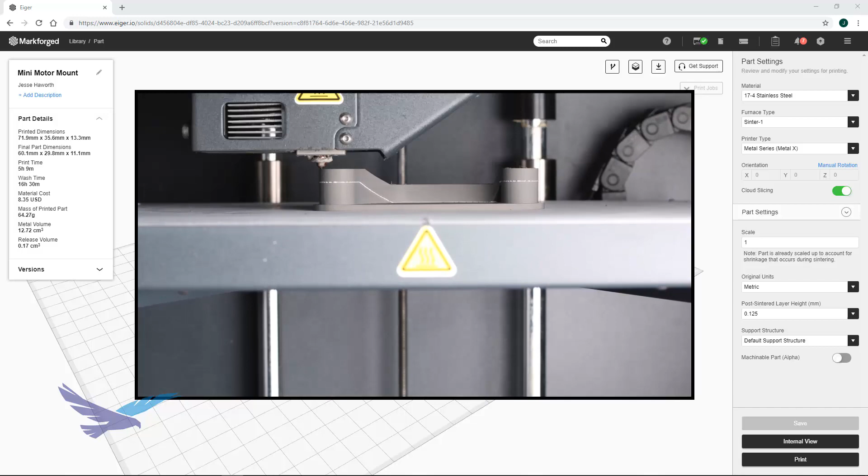As an extrusion-based machine, Metal X parts are formed layer by layer in the Z direction until all geometry is complete, as you can see in this short example. By default, Eiger will place support structures under any overhanging geometry to prevent poor part quality. Since support structures are made up of the same base metal material, Eiger places a ceramic release layer in between supports and part geometry, as you can see here.

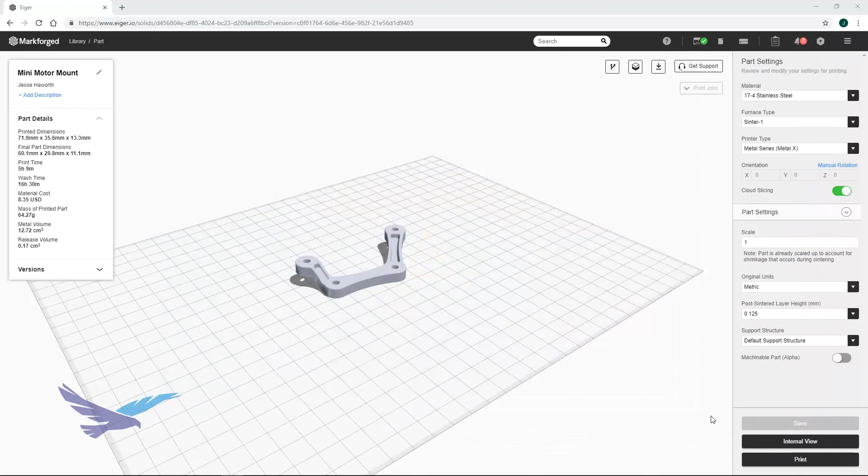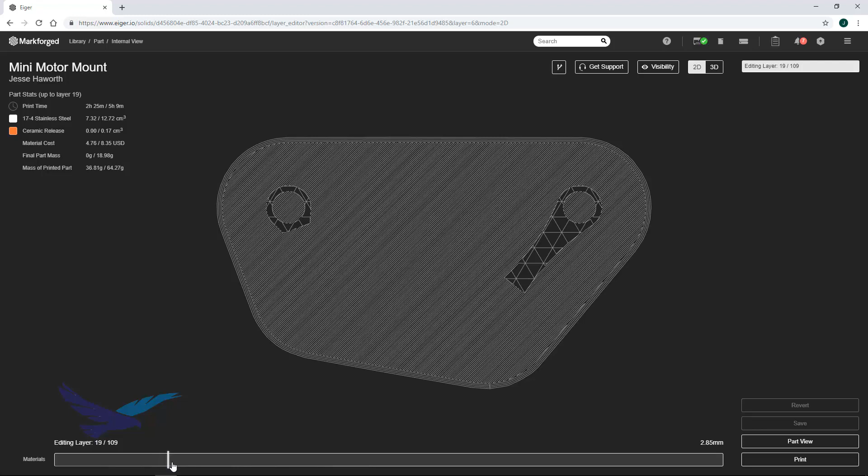To get a better look at the toolpath of support structures, you can go to the internal view of an Eiger part and turn off visibility for all display options except for support material and ceramic release. Here you can see where supports will be placed and where the ceramic release barriers are. Once parts are completely printed and sintered, the ceramic barrier will vaporize, making the separation of supports from your actual part easy.

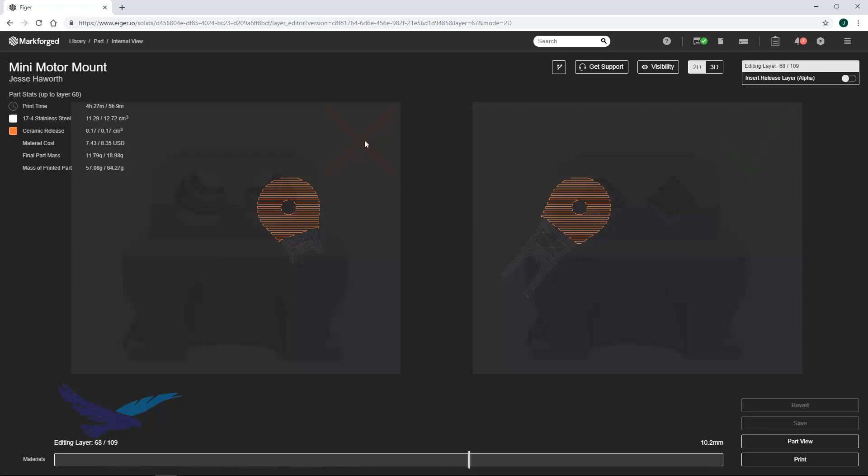As with other extrusion-based machines, simple additive manufacturing practices such as changing overhangs to be self-supporting can go a long way towards eliminating supports. That being the case, not all geometry can be modified to eliminate the need for supports, and some supports may not be very easy to remove due to part structure. So let's go over the first option that Markforged has added by taking a look at this cylindrical part.

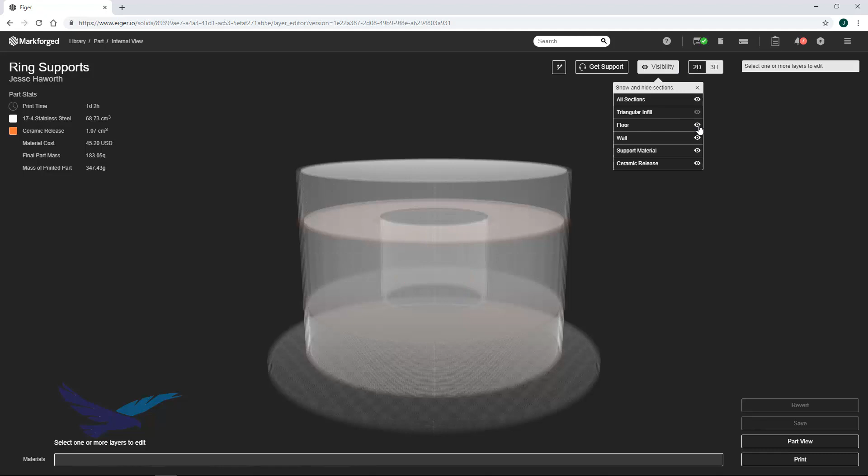So if we take a look at the internal view of this example part, we can see that the support structures that hold up the overhanging geometry are surrounding the central cylinder. Even though the supports are separated from part geometry by the ceramic release material, the shape of the part itself will prevent the supports from being removed in their current state. To avoid the need for any sort of major redesigns in situations like this, Markforged has added the Radial Support option, which we'll select here.

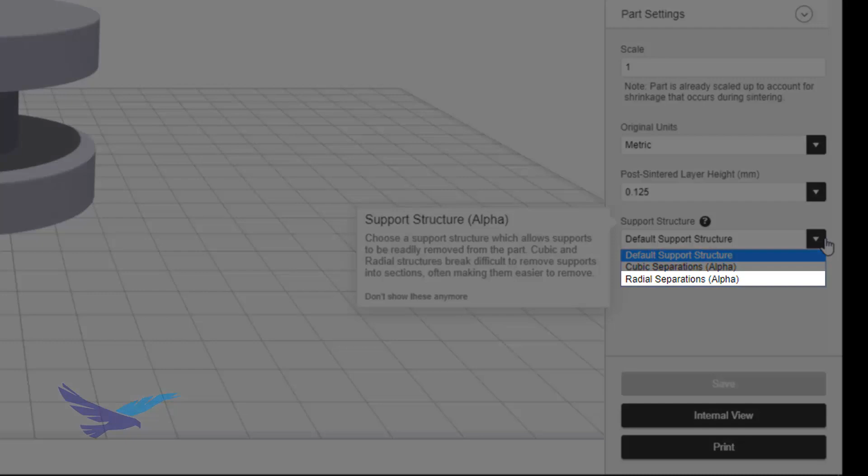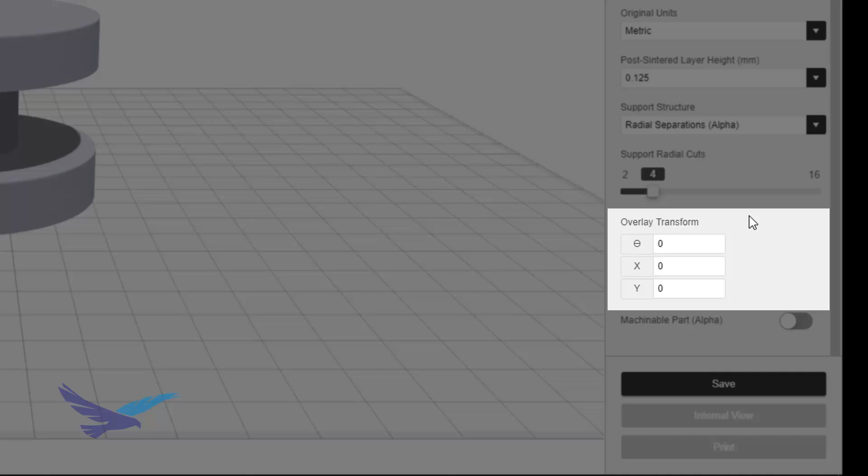Radial supports separate all of the support structures of your part into even breaks, which originate by default from the center of your part. You can think of this like separating support structures into slices. The radial cut slider that we'll use here changes the number of slices, and we'll change that to 4 cuts for this example. If needed, you can also use the overlay transform tools in conjunction with measurements taken from your CAD software to change the origin point or rotation of these radial cuts. Once we've made our desired changes, we simply need to resave the part to apply our new settings.

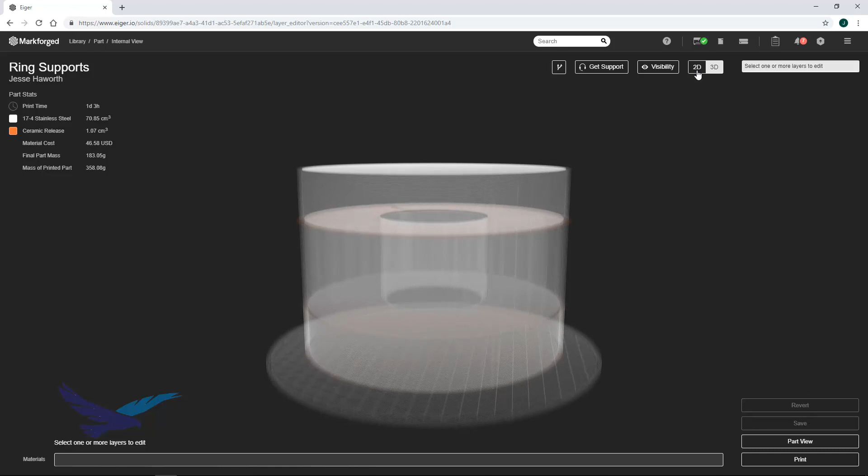To confirm that the supports can now be easily removed, all we need to do is go to the internal view of our part and navigate to a layer that has supports. As you can see, the radial cuts extend from the center of our part and into the 4 pieces that we specified. Once the part is completely printed and sintered, this will make them easy to remove.

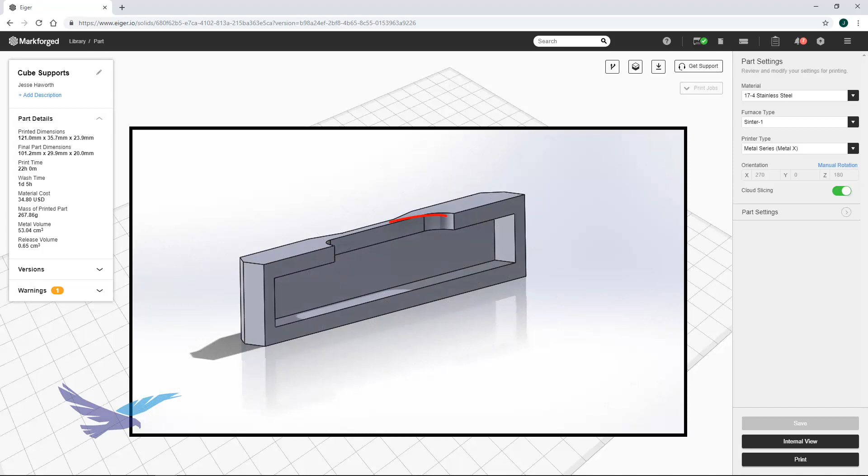To go over the second support option that has been added, let's open up this next example part. As you can see from the cross-section of this part, it has a fairly large internal cavity, but doesn't have an opening large enough to remove the supports that would be needed for the overhanging roof layers. Radial cuts may not give us the results we need, so we've changed these support structures to the new cubic supports option. This changes the support structures into cubes of whatever size we specify. From our CAD software, we know that this opening is around 10 millimeters in width, so we've set the size of our support cubes to 5 millimeters to make sure that they can be removed easily.

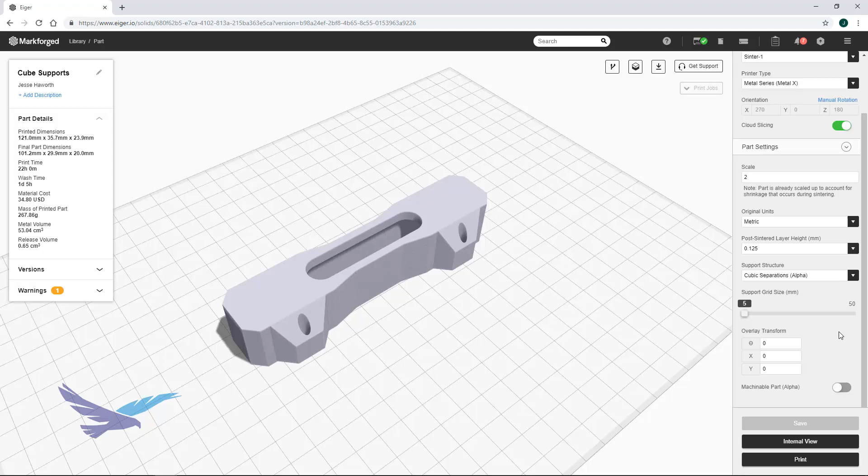To see how this impacts our internal supports, let's go back to the internal view and turn off everything except for supports and the ceramic release barriers. As you can see here, this option allows each cube to still be separated from actual geometry with the ceramic release barrier, while giving us results that are better suited for this part.

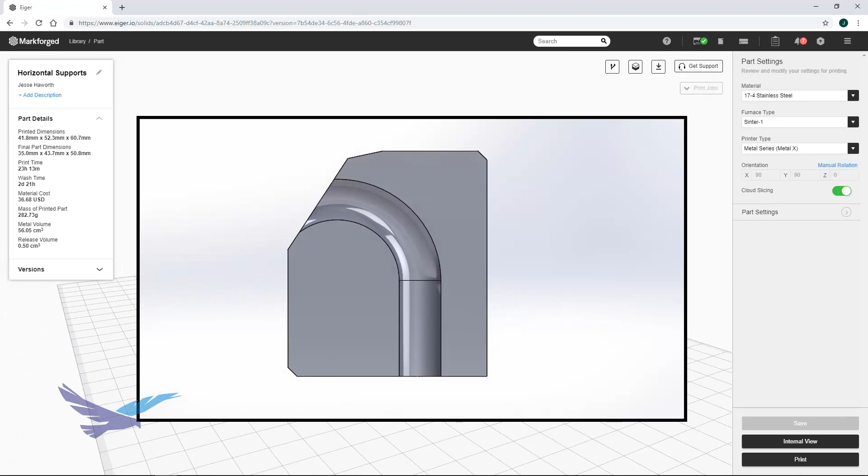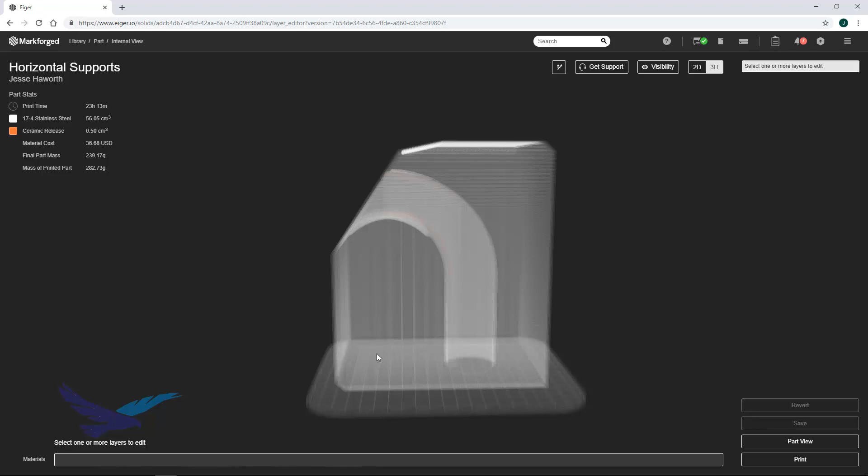The last option that we'll take a look at is the ability to add manual horizontal release layers. To do that, we'll open this example part that has a hook-shaped through channel. Due to the shape of this through channel, both radial and cubic support structures may still be difficult to remove. Like with our previous parts, we'll go to the internal view to see how supports will be printed. As we talked about earlier, ceramic release layers are typically placed by Eiger in between support structures and part geometry. This final supports option lets us manually place a ceramic release layer into support geometry, which separates them in the Z direction after the part is sintered.

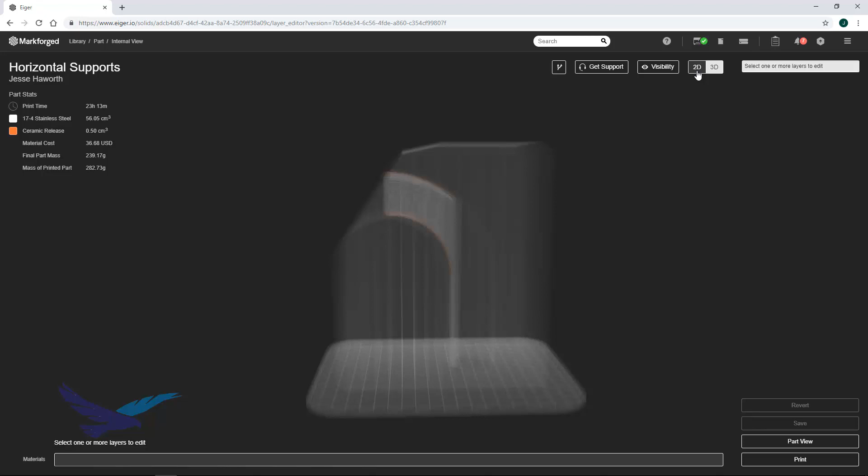To make the supports of this part easier to remove, we'll look to manually place a release layer around this area. All we need to do to accomplish this is switch to the 2D view of our part, navigate to the layer that we want, and select the Insert Release Layer option. Doing this will place a layer of release material in between the prior and following layer of supports. This means that they won't be fused together after they sinter.

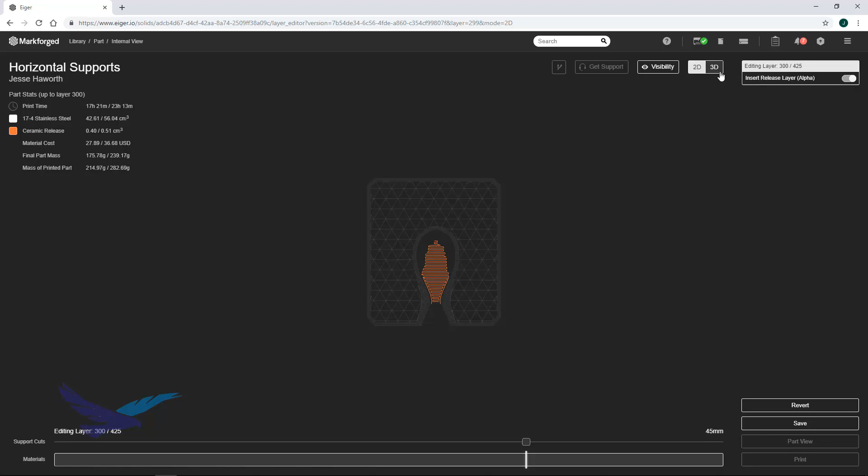If we switch back to our 3D view, you can see that a release layer has been placed here. We could potentially add other release layers to different areas of the supports to make sure that they would be easily removed, but for now all we need to do is click Save to apply our changes. With these changes saved, the part is ready to print.